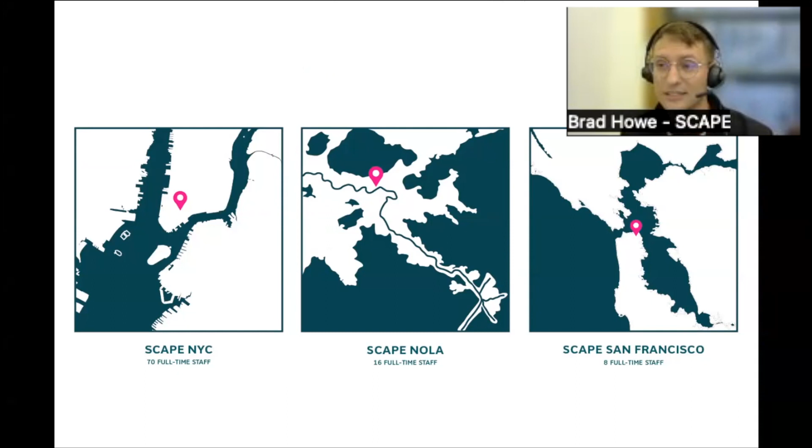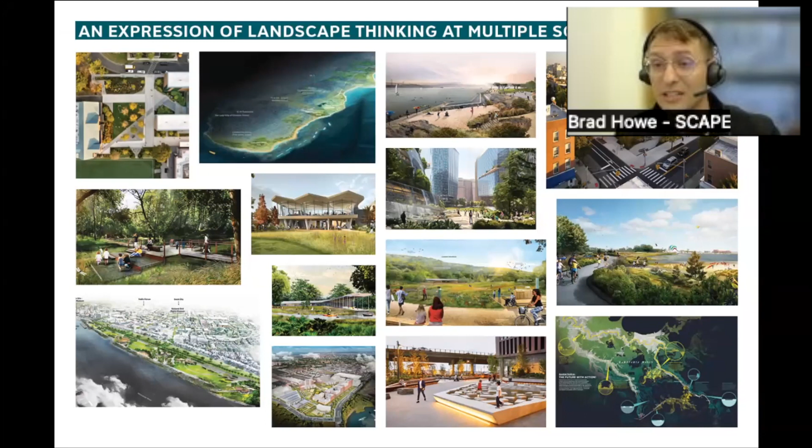So a little bit about SCAPE. We have 3 offices across the United States, an office in New York City, an office in New Orleans, and an office in San Francisco. And we are an office comprised of landscape architects, urban designers, urban planners, and horticulturalists. And this kind of multifaceted skill set in an office really allows us to think at multiple scales and take a really multidisciplinary approach to design, and through an expression of landscape at those multiple scales, ranging from anything from a small urban plaza to a master plan at the scale of a watershed in a 100-mile river corridor.

And so through that work, we really seek to revive landscape systems, identify those systems and bring them to the foreground, forge connections between people and the ecology and their environment, generate new ecosystems, in thinking about what the future of our urban ecology is, and embracing that physical reality through actually getting to the site, touching it, and experimenting, piloting, and engaging people in that process.

And so there's a great introduction on Living Breakwaters, and so I'm going to share that project with you today. And I'm going to share one other, Tom Lee Park in Memphis. These are projects that are quite different. They're both situated on the waterfront, one is actually in the water, while the other one is along the water, and they're both in very different environments. One is coastal in Staten Island in New York City, and the other one is along the Mississippi River in Tennessee. But they do have some things in common.

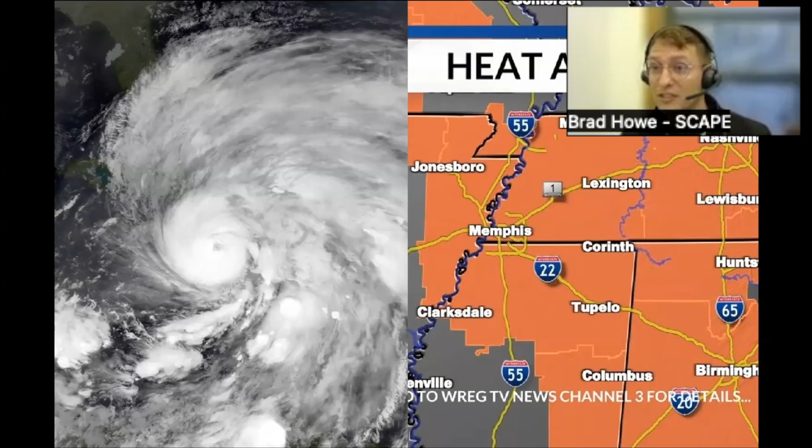They're both landscapes that mitigate future risk, but in different ways. So with the Living Breakwaters, the idea is that this is a project that uses a blue-green infrastructure approach to mitigate coastal risk from future hurricanes, coastal erosion, and sea level rise. Whereas Tom Lee Park is much different. I think Memphis has a different set of challenges, and I think especially felt this summer with the incredible heat waves that really hit this region. And so this kind of emphasis and need on open space and shade and trees has really come to the forefront in this community.

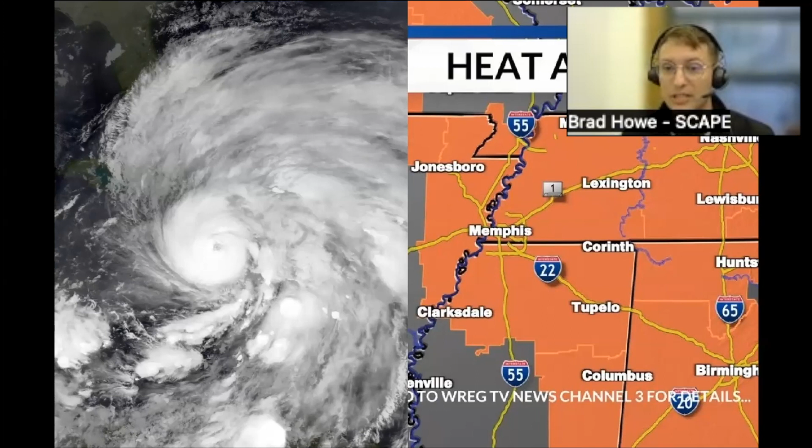And they both have ecosystems and species that are struggling to keep up with the pace of change. In Staten Island, the oyster - this is a species that was once prolific in the harbor and has now been nearly depleted. There are large-scale restoration efforts looking to bring them back.

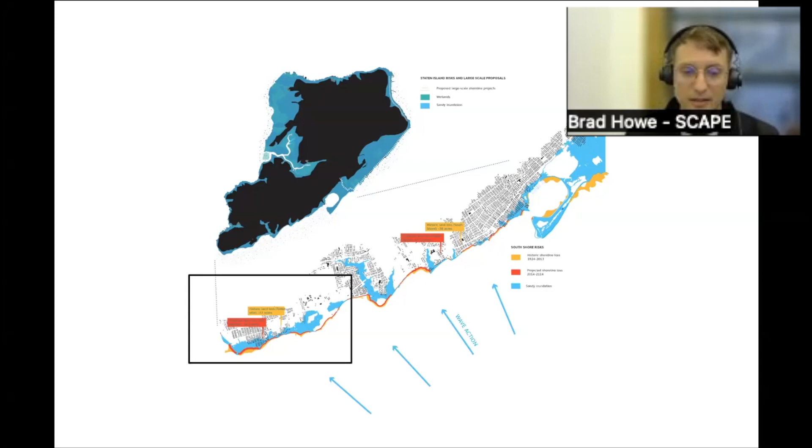So a competition was launched called Rebuild by Design. This was a challenge to designers, thinkers, planners, architects, landscape architects to come up with ideas to address climate change and address these increasing risks of living in this area.

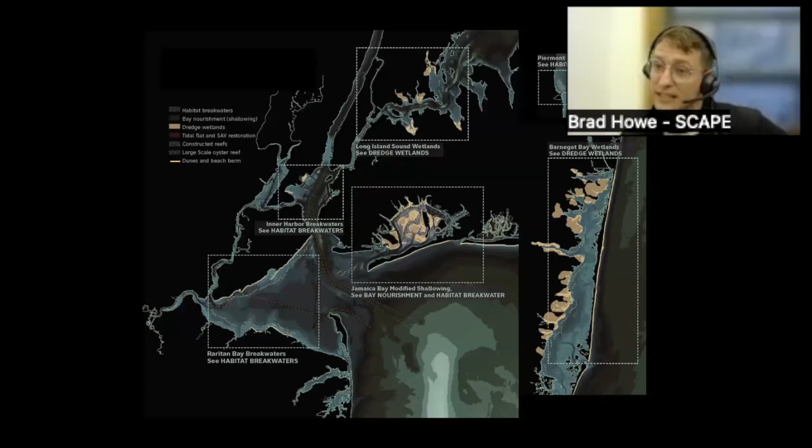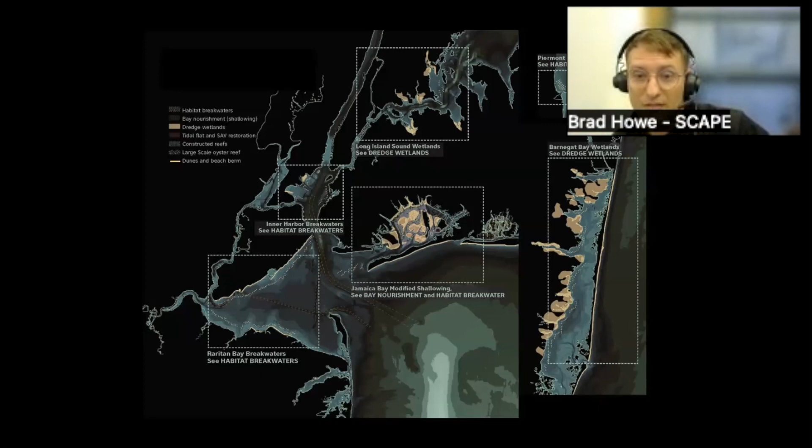And SCAPE led a team to - the first step of that was to research these bay shallow areas in the region and come up with 5 or 6 proposals for a project. Out of that research phase, the Living Breakwaters project was selected to advance into the concept and competition phase. And so we assembled a team to do that.

And the team grew. Once the project was awarded funding and won that concept and competition phase from Rebuild by Design, the Governor's Office of Storm Recovery in New York led the implementation of this. SCAPE assembled a team of engineers, ecologists, and nonprofit organizations, including the Billion Oyster Project, to really come together and make this project a reality.

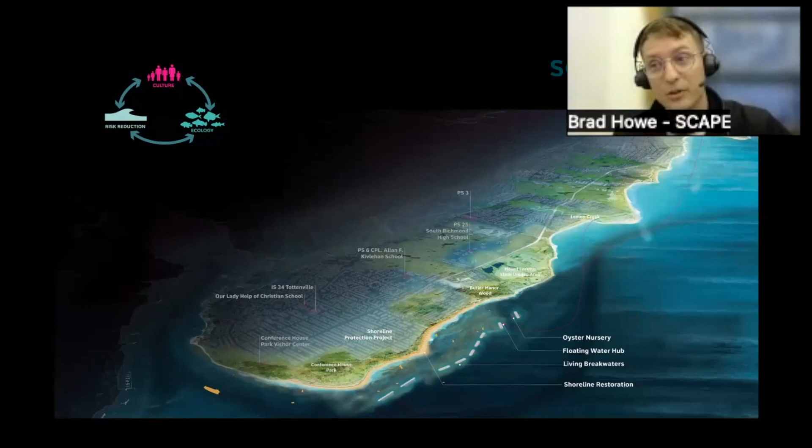And so here's that first rendering. You can see this offshore series of breakwaters designed as an integrated approach to coastal risk reduction, habitat generation, and establishing a culture of resilience on the shoreline and educating people about coastal risk. So the project itself is more than just a living breakwater.

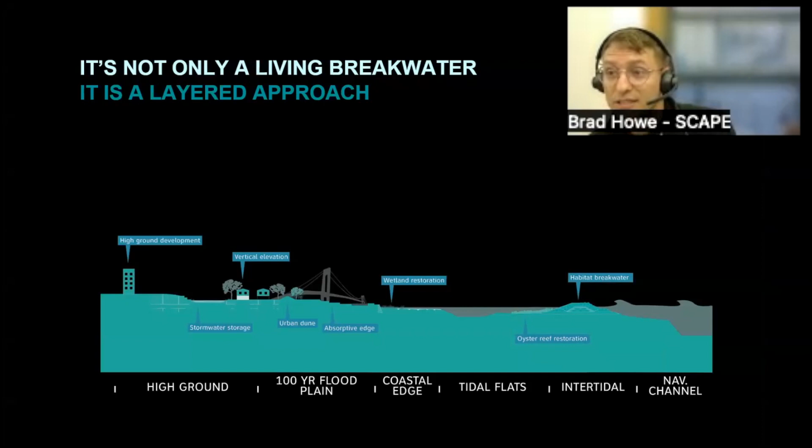It's a layered approach of different resilient solutions that creates this culture of resilience on the shoreline. And I'm going to start peppering in some construction photographs here because we're very excited that this project's moving through its construction phase, and it's nearing its halfway completion point. But you can see how this layered approach is starting to take shape.

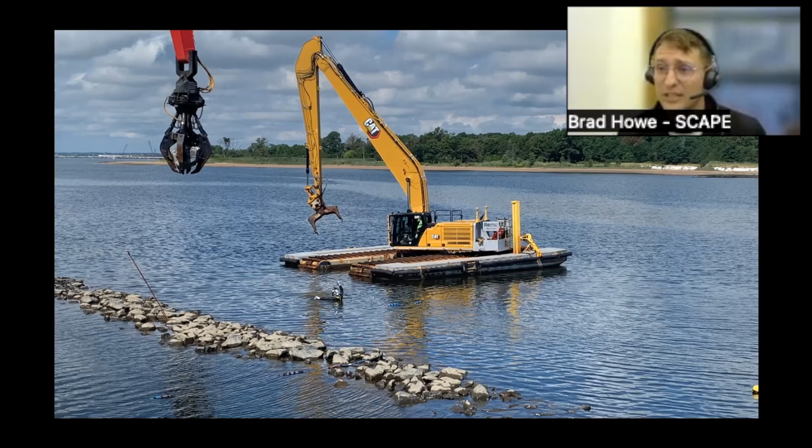You have this onshore dune, a beach, this calmer water between the beach and the breakwater, and then the habitat breakwater offshore that attenuates the storm waves and reduces the shoreline erosion.

So in looking at those three parts - the risk reduction, the habitat creation, and the social resilience - the first point of living breakwaters is it's blue-green infrastructure that mitigates coastal risk. So living breakwaters build beaches, they reduce coastal erosion and help build that beach back.

And so you can see here, this is just a diagram that shows how we had to work pretty hard with our engineers to calibrate the distance offshore to make sure that we were getting the kind of salient response on the shoreline that we were looking for.

Breakwaters attenuate storm waves, but they do not keep floodwaters out. This is an important concept in the overall narrative of adaptation: there's no one solution to fit everything. There needs to be a conversation about the risks of living on the shoreline, identifying different coastal risks that projects can attenuate or mitigate. Here, the riskier component of the shoreline is exposure to larger storm waves, so the idea was that these living breakwaters can attenuate that risk.

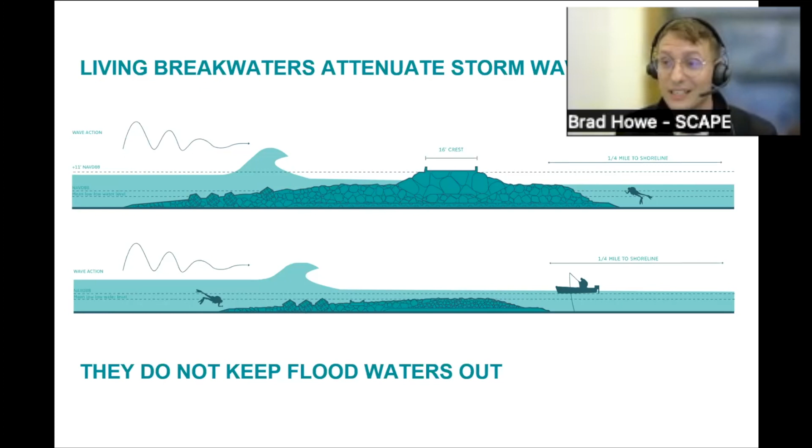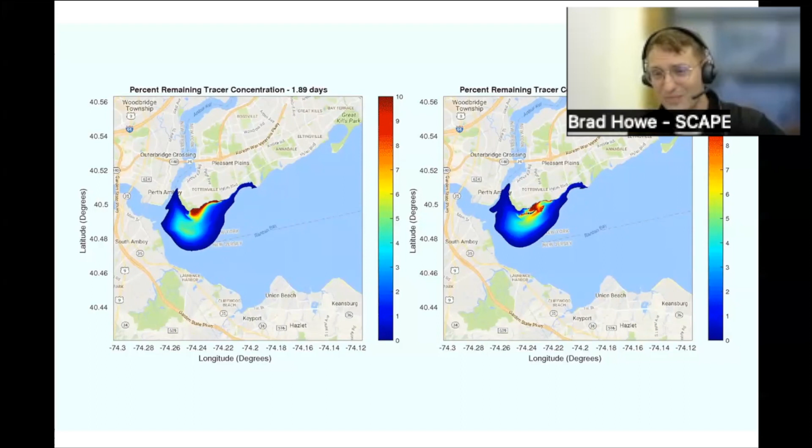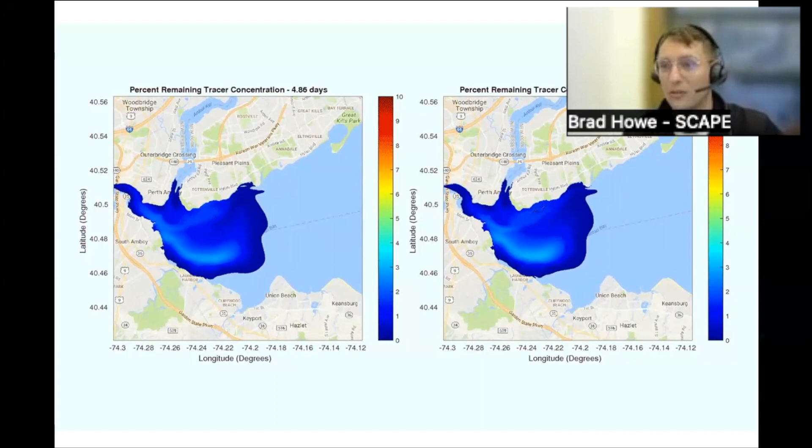We did that through a lot of coastal modeling, running computational models with our engineers to evaluate the effectiveness in wave height reduction through computer simulations of wave environments. We had to model and test water circulation and flow to make sure these structures weren't impeding the movement of water, and that the system was adequately flushing out, so there's no stagnant water behind the breakwaters. We even modeled these in a research facility.

And then here they are emerging from the water. You can see those, they almost look like little pork chops, but those are actually precast concrete tide pools that create more habitat in the structure, and also are substitutes for the armor stone or rocks in the breakwater itself.

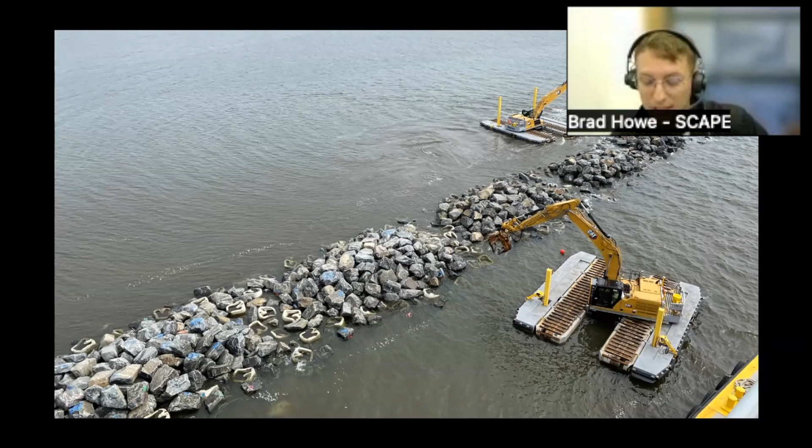This is just an image looking out. You can see back there, that's the crane barge that assists with individually placing stones from a barge onto these structures.

What we call them are reef ridges. They're essentially protrusions that reach off the main breakwater trunk that provide smaller niche spaces for young fish to retreat in the rock pores and then move out into those open reef streets and feed. So there's pore spaces for fish.

There are also ECOncrete armor units and ECOncrete tide pools. These are precast elements that function structurally within the rubble mound structure, but they've been precast with concrete specifically mixed with an admixture that targets and promotes biological growth on the concrete structure. And of course, there's room for other critters to roost on top of them as well.

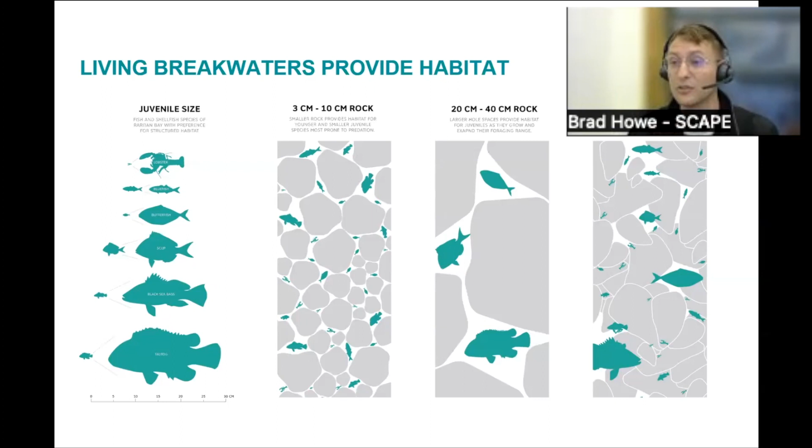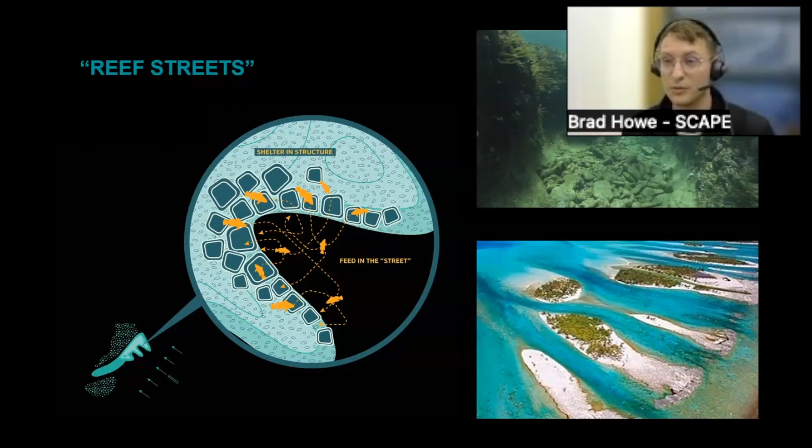The reef streets themselves are modeled off of naturally occurring structures and reefs. You can see how they create corridors of movement, allowing fish to find feeding ground, but also have a place to retreat to should they be in danger of predation.

This area was also constructed in Tottenville, also known as the town that Oyster built. A long time ago, this place had a thriving oyster economy, which has since diminished. The idea behind the living breakwater structure is to use them as a mechanism for oyster restoration in the Raritan Bay, which can be done through multiple methods.

Our partners at the Billion Oyster Project have been researching and piloting different techniques to evaluate their performance before placing them on the breakwaters. This ranges from gabion structures and cages with oysters seeded with larvae, to ECOncrete units that have attachments that can be seeded with oyster larvae and then attached to the structure where oysters can grow.

And also fundamentally, the living breakwaters provide more rocky structure, so as oyster larvae floats through the bay, they actually have something to settle and land on and accumulate.

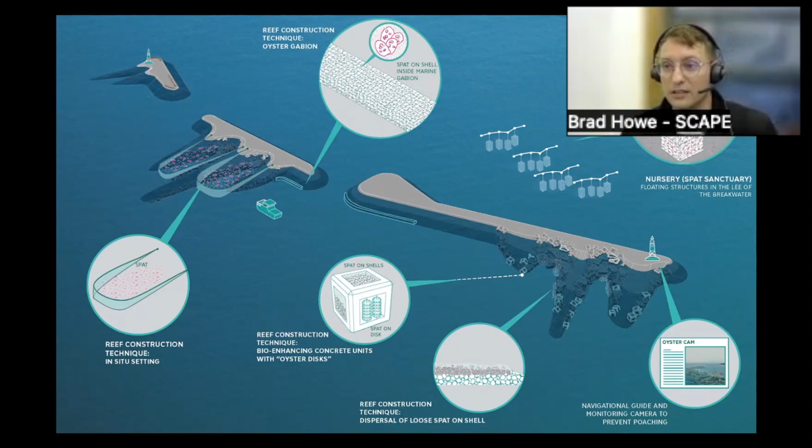But to design good habitat, you have to understand what you're designing for. So we did a lot of surveys. We had divers go out and look at rock piles in the area to see what was living there, what was growing on them, take samples of them, test them, bring them to a lab. And that allowed us to create a target species matrix, which helped us design the right pore spaces to target the right species and design that habitat for animals that are actually living there.

We had to understand the sediment system, so we looked at sediment grain size. We had people go out and take sediment grab samples, test them, evaluate them in a lab. And then we translated that data into our computer models to be able to model shoreline change.

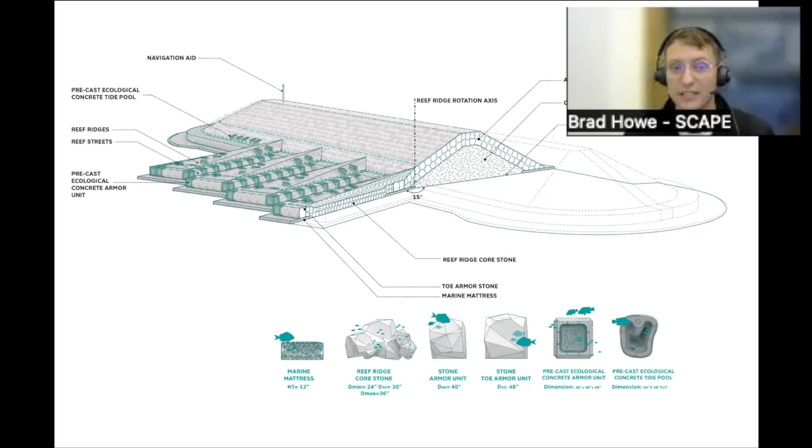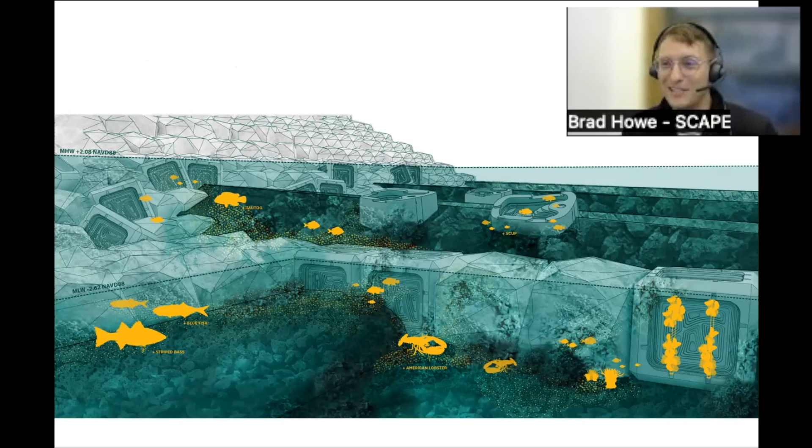This shows how those structures work together, ranging from a variety of stone sizes, the marine mattress, and those precast ecological concrete units, all coming together to form this habitat structure that provides robust underwater habitat life. And I think what we've found in the installation of these few concrete structures and breakwaters that have gone in now, things are already starting to move in and grow.

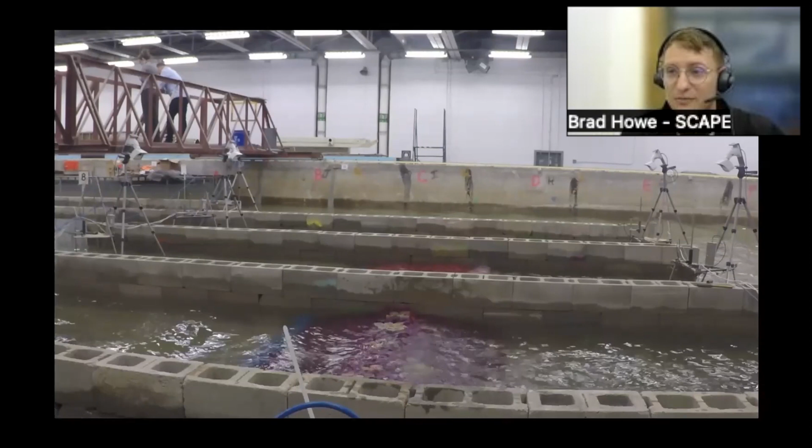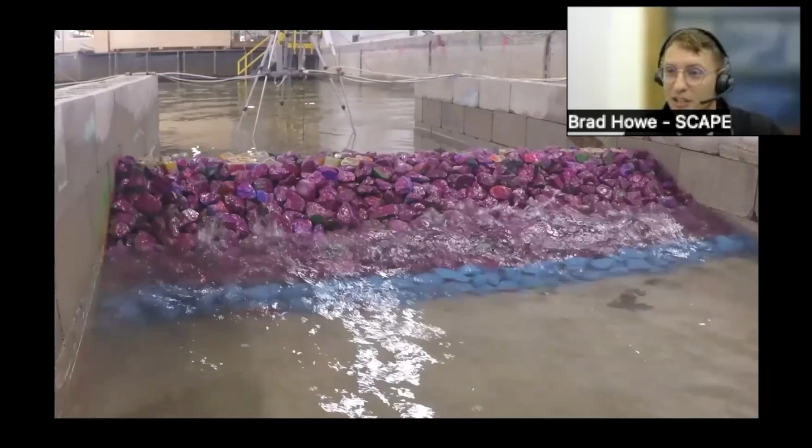Finally, we had to really pilot test and experiment. So this is video footage from that wave tank I talked about earlier. You can see how different sizes of waves were tested, crashing into that structure. The different colors of rocks are spray painted to correspond to the different rock sizes specified in the project, so we could track if a rock was dislodged, where it was dislodged from, and evaluate the design.

Finally, for that last part of building social resilience through education, the idea is to create a culture of resilience at the shoreline through educating youth about coastal risk and how the Living Breakwaters actually mitigate that risk. This is done through organizing oyster restoration volunteer events, with student volunteers helping, and holding a variety of community engagement events to help kids understand the cross-section of the bay environment and what's living down there.

We bring people to the site, teach them about the dynamics of the site, and show them how the Living Breakwaters project will change that. And then finally, taking it to the classroom: we've been working with the Billion Oyster Project to develop a curriculum based on Living Breakwaters. The idea is that high school STEAM teachers can download this and include Living Breakwaters and some of the Billion Oyster Project's restoration efforts into their curriculums.

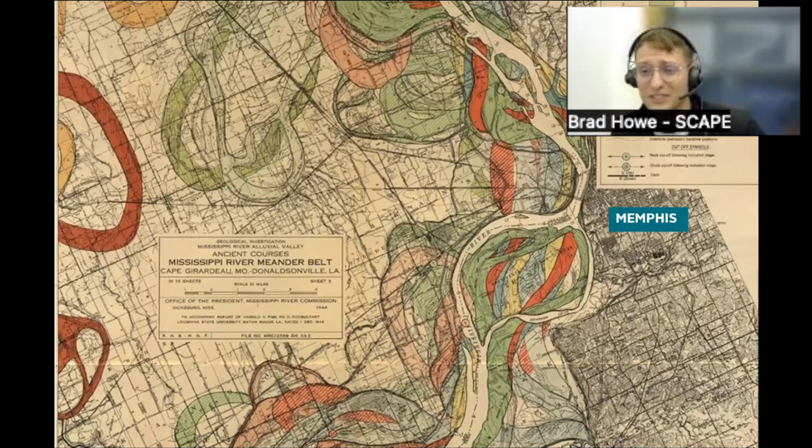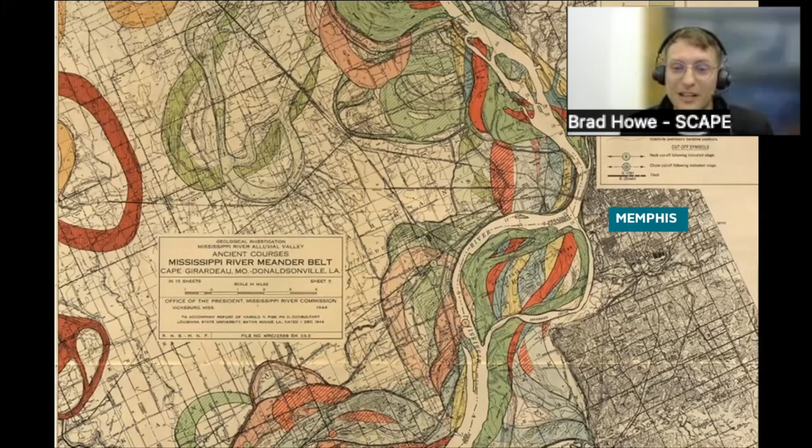Now moving south a bit to Tom Lee Park, a very different context. Tom Lee Park is on the mighty Mississippi, which, as these beautiful Fisk maps show, is a difficult river to predict and channelize, despite some of the best efforts along the river. We were really inspired by the context of the park and by the meandering forms the Mississippi River takes on in that region, and you can see that reflected in the design.

But it's in a weird place in terms of how the site was created over time, and the history of this site is actually quite interesting. You've got Memphis, located up on a bluff, and Tom Lee Park at the base of that bluff along the riverfront. Across the river, you can see the dynamic floodplain of Arkansas, which has not been hardened, so you can see the flood paths the river takes through its seasons. On the Memphis side, it's expressed as more of a stark line.

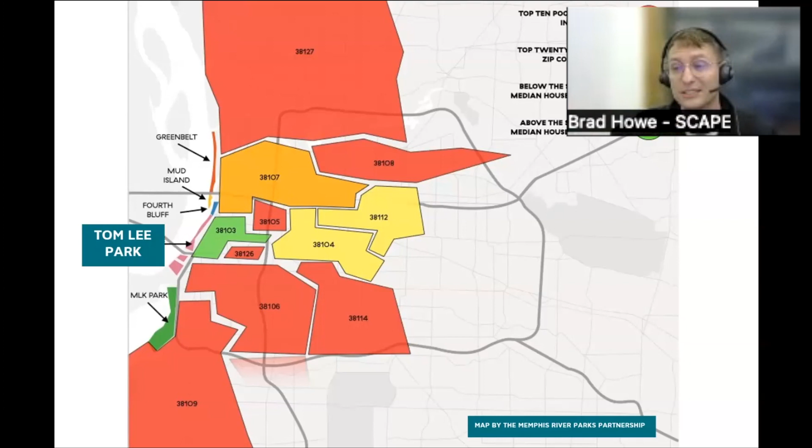And what's interesting about the Memphis riverfront is it's really this common ground. It's a place for all Memphians. So you can see in terms of the context of the space, 6 of the poorest zip codes in Tennessee are actually in the vicinity of the Memphis waterfront. But you can also see there are zip codes that are above the median household income. So there's a really large transect of populations that live near the riverfront. And the idea is that this riverfront is that common ground for all people to be at and enjoy. But it's not really accessible.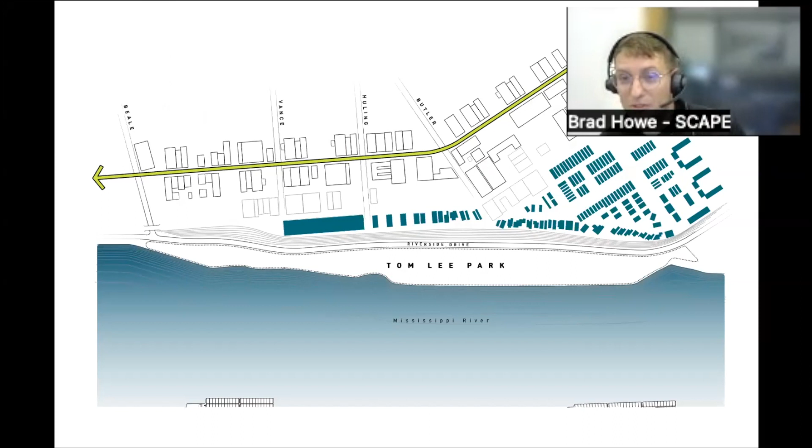The bluff kind of really cuts access from the city to its waterfront. So a big part of this project was unlocking that access and bringing people to the water's edge through ADA accessible connections down the bluff.

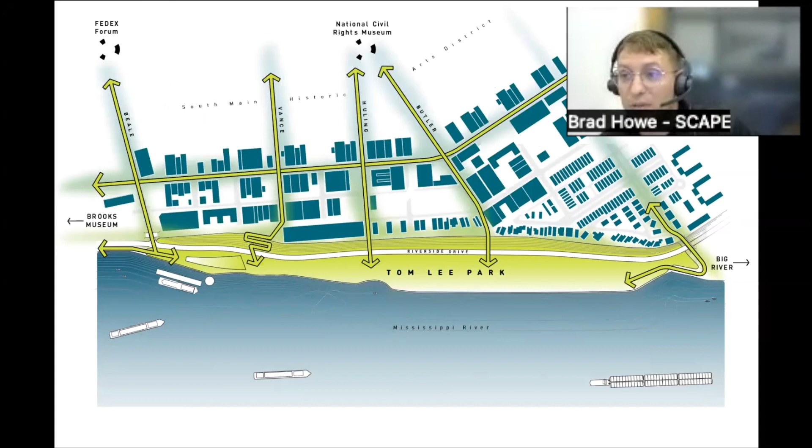So it took a team to get there. We partnered with Studio Gang, who led the team of designers. We were the landscape architects on the project. There's a couple structures in the park that they designed, and they've been really great partners throughout the design and construction process. And then of course it goes without saying, the Memphis River Parks Partnership, huge in the fundraising for this, spearheading its implementation and making this park a reality.

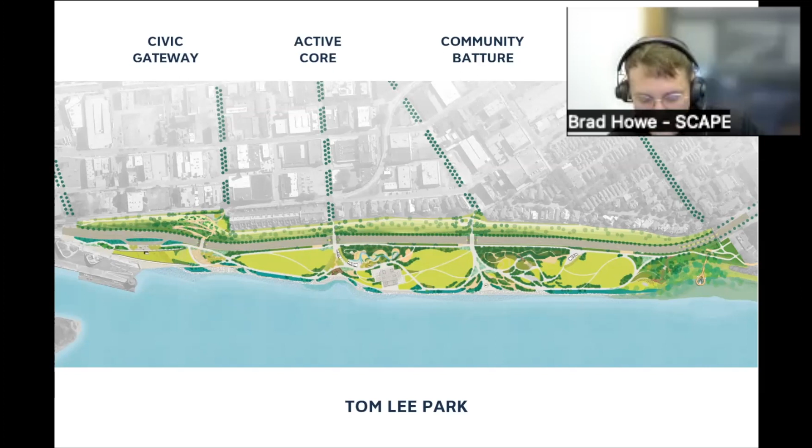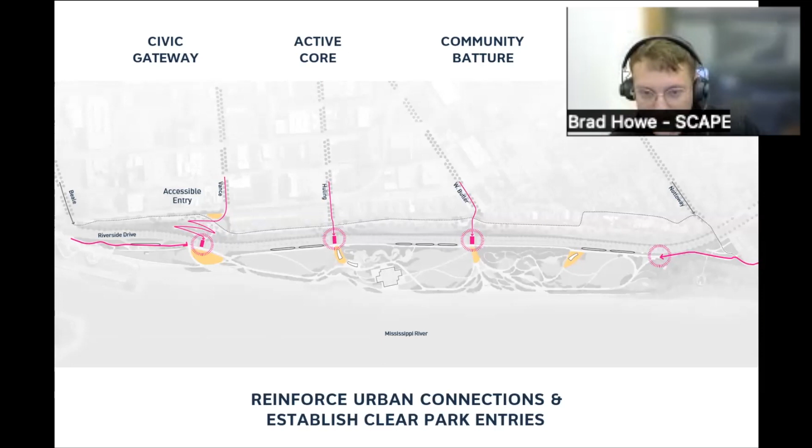So in terms of setting up that structure, we first wanted to reinforce those urban connections, connect people that live on the bluff, down the bluff through ADA accessible entries to these key landing points and entries. And then connecting those with a hierarchy of different path networks that stitch together a range of active park uses.

And through that, we had these different zones emerge that had different almost characters. There's the civic gateway, there's the active core, which is very playful, active, and fun. The community batture, which is marked by topography and more pensive park moments. There's a memorial sited there, an overlook, a picnic grove.

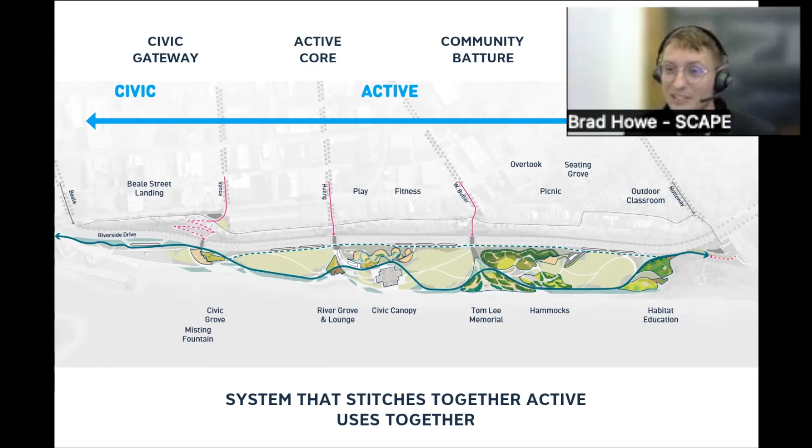And then finally, as the park transitioned to this edge of the rock wall that had actually collapsed, and the river had kind of taken it back a little bit and reclaimed that space, there was a lot of riparian habitat. So the idea is to create these habitat education elements to really bring people closer to the river's edge without getting them down to the water. Because as you can imagine, the Mississippi is not a safe river for people to get close to or even dip their toes in, because its currents are so powerful.

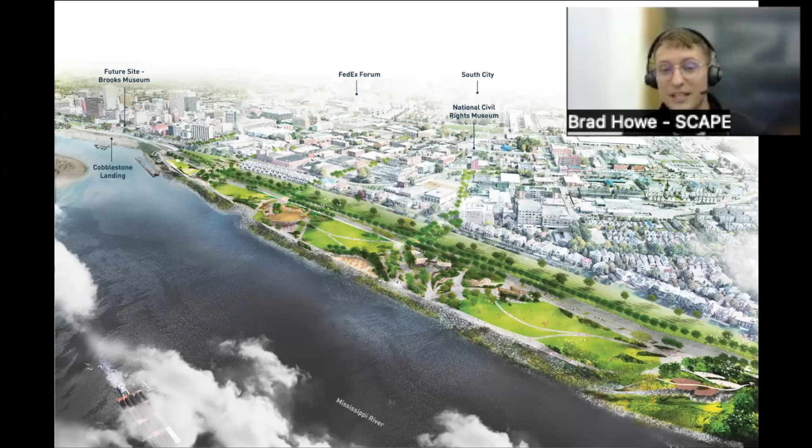And so this is the rendering we showed that kind of shows those dynamic forms. And this is the park kind of in the middle of construction. So y'all are getting a little bit of a sneak peek of 2 projects that are very much in the middle of their construction process.

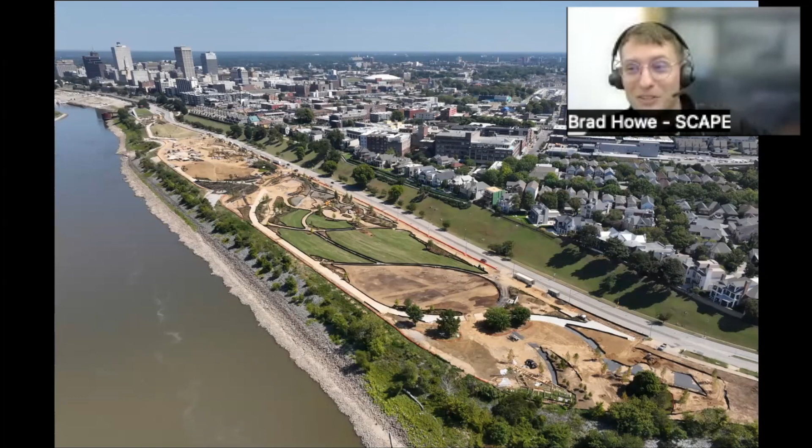So I just thought I'd walk through each of the zones. The Civic Gateway has 2 major components. It has that ADA accessible walkway that connects the city up on top of the bluff down to the park, crossing the street to this almost civic water feature and plaza.

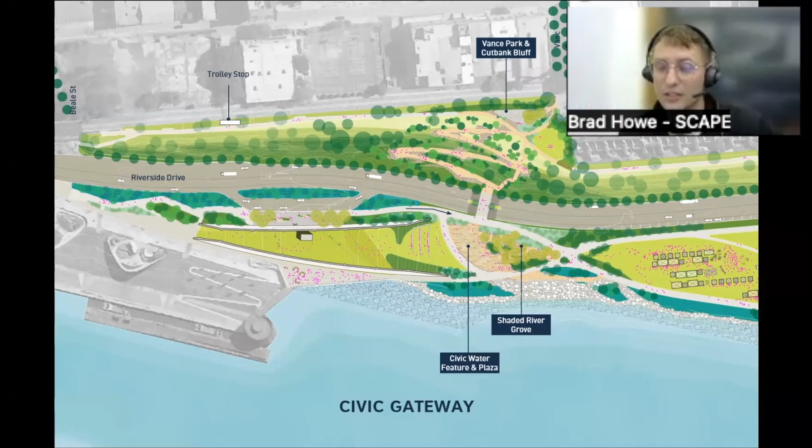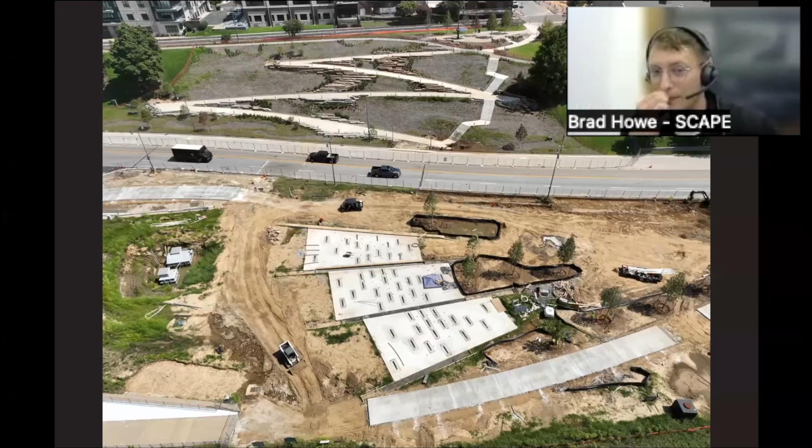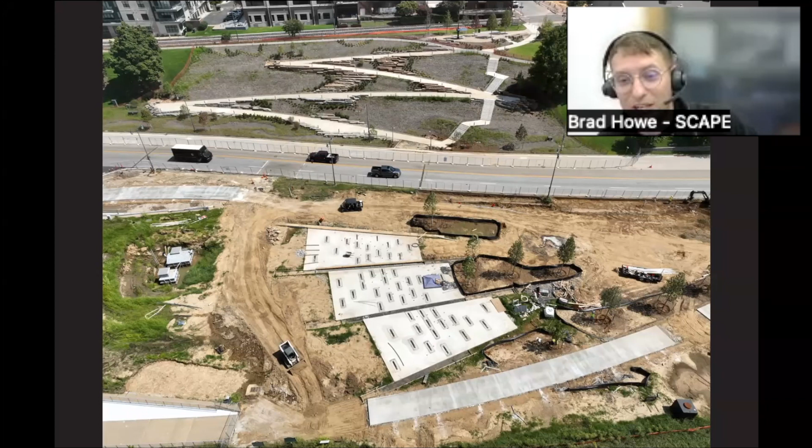These are just some renderings of the bluff and that plaza, and then you can see them in process and in construction. The idea here is to greet people from the north with a very civic space, providing paved areas for performances, for farmers markets, for different events, while also simply planting trees for shade and creating a shaded grove right adjacent to that area.

This is what we call the Cutbank Bluff, which is that ADA accessible entry and pathway down the bluff.

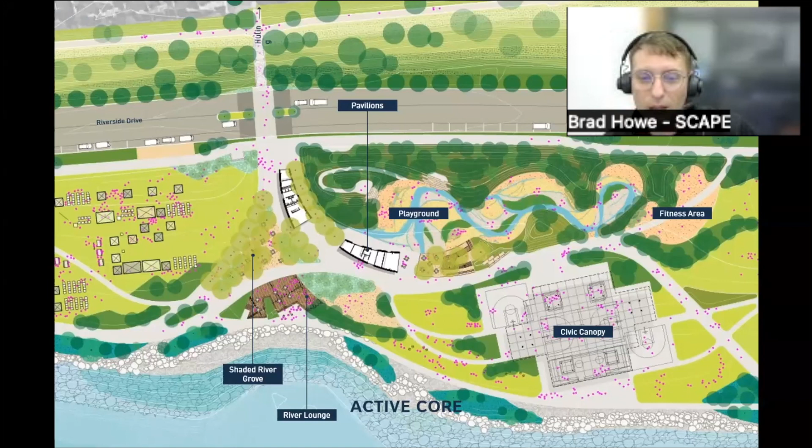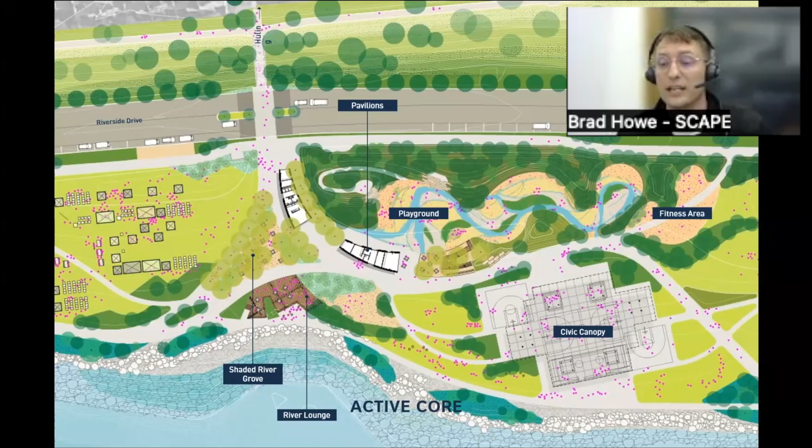This is the active core. The idea here is this is sort of teeming with activity. We've collaborated with Monstrum for the design of a really unique and iconic playground. Studio Gang designed an incredible overhead civic canopy that shades sport courts. There's 2 pavilions to support park programs, and then some smaller spaces to just sit and enjoy the sunset over the river.

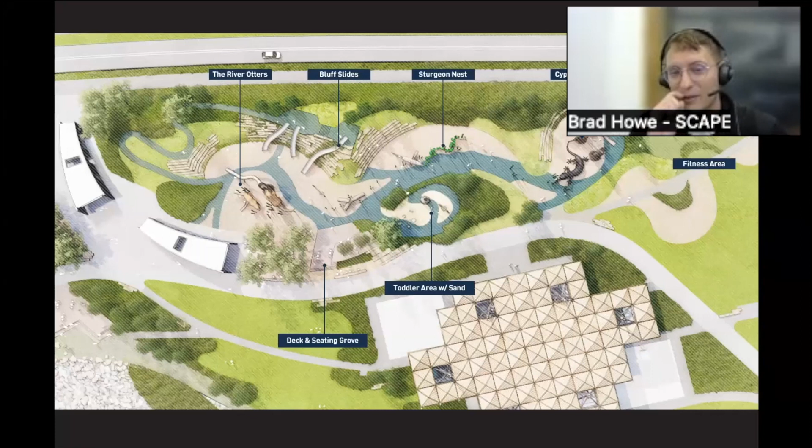You can see that civic canopy in the background here. And this is the plan of our playground, which has been designed and inspired by this idea of life on the Mississippi. So the blue is a reflection of the Mississippi, one of the Mississippi pathways in that Fisk map. And along that are some different characters of the river or different wildlife that you might find at the edge.

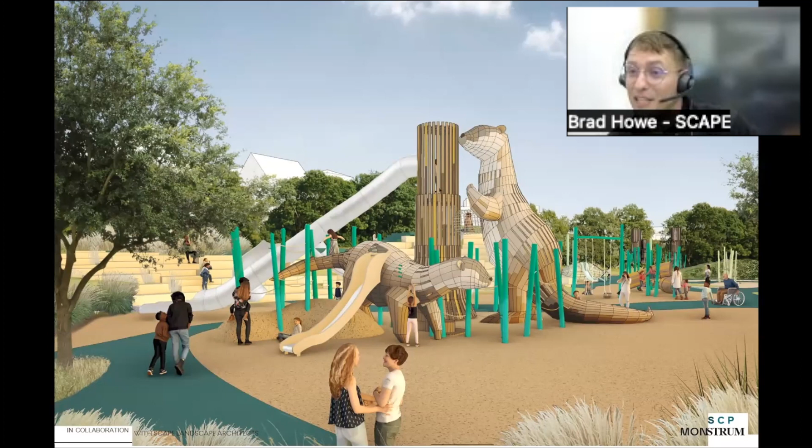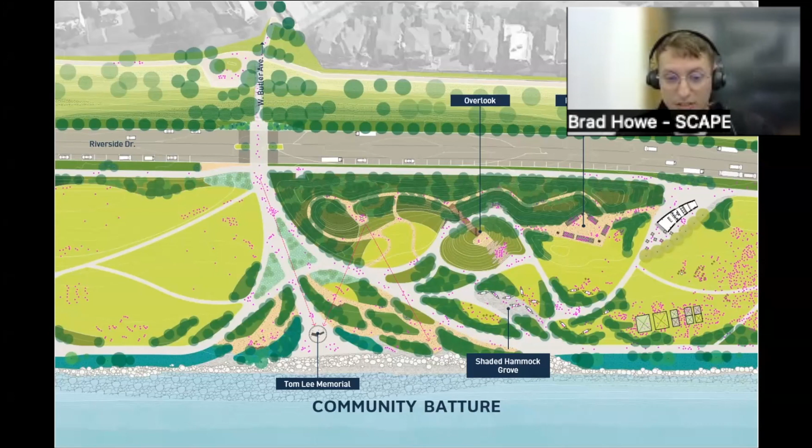And it's also been supplemented with the work of artist Theaster Gates, who we've collaborated with to create a site installation that creates a sort of walking experience through the park to tell the story of Tom Lee. And you can see that here.

There's a point of reflection in that circular kind of place to be that connects to this, what we call the point of redemption, which is this moment of reckoning along the water's edge, and a reminder of the heroism of Tom Lee. All the while, that procession and connection to that installation always has views back to the original Tom Lee Memorial statue. So it's always a reminder along that way of the risk that Tom Lee took to save these people.

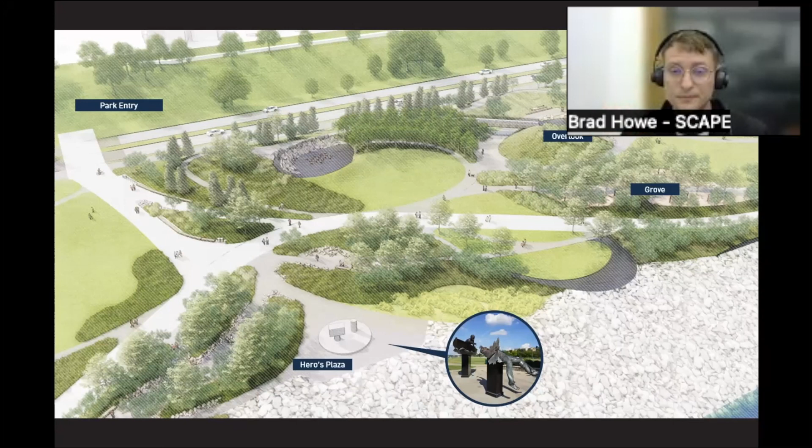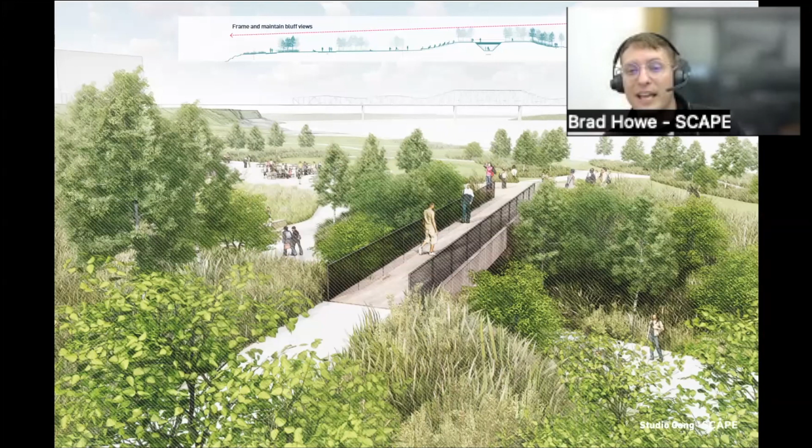But the Batture also has great topography. We really wanted to elevate people up off of that flat surface and give them different views of the river. And what was interesting about this particular project is that we were a little bit limited in what we could do because this is a huge erosion protection infrastructure project by the Army Corps.

We weren't actually allowed to dig into the site. We were only allowed to import fill in this case, because had we dug, we would have compromised the integrity of the cap, which basically keeps water from draining into that dredged material and creating pressure on the backside of that rock wall.

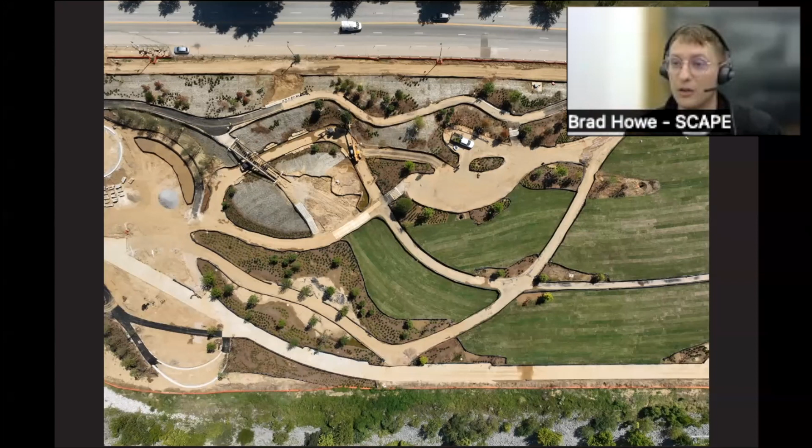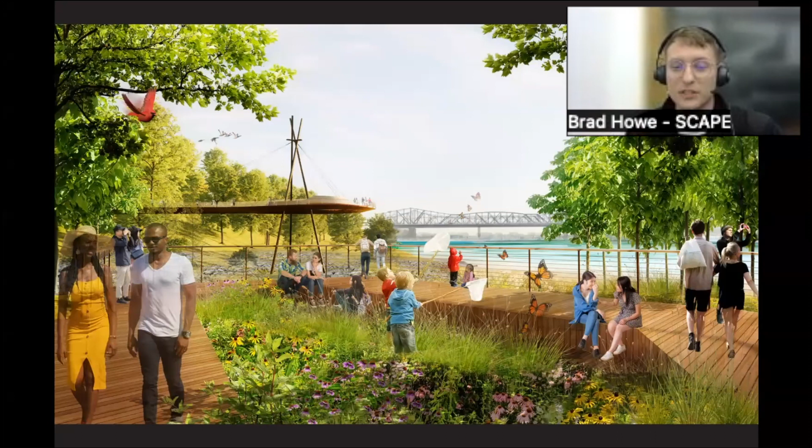And finally, the habitat terraces. The idea behind this area is to really get people a little bit closer to the river, a little bit closer to the water's edge, to really engage with the natural wildlife and habitat of the place.

Because the Memphis riverfront is habitat, despite its very urban location and urban character. It's very much on the Mississippi River. It's on the Mississippi Flyway. And this is a place where many, many insects and many, many animals make their home. So one thing we thought a lot about was this location on the Flyway, and what different plants have these host relationships with these different insects. So the milkweed for the monarch butterfly, but there's also this great story of the pawpaw and the zebra swallowtail.

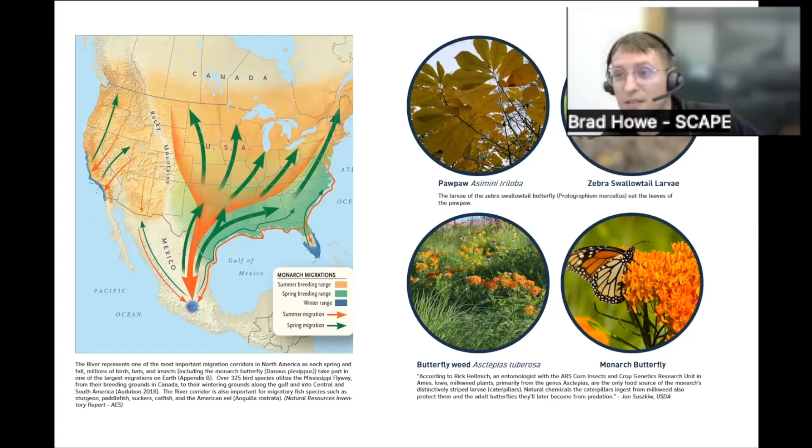The zebra swallowtail larva really only eats the leaf of the pawpaw, and so there's this great symbiotic relationship between the two. So we really look to plant these charismatic host plants and insect relationships into the park through implementation of what we call the pollinator shoreline.

So we designed the shoreline with different plants that target the monarch butterfly to create a stopover along the flyway that will hopefully attract all of the different species that use the flyway, but hopefully mostly the monarch. Actually I was on site yesterday and counted 5 monarch butterflies, and we haven't even planted the milkweed yet. So I know that they're there.

But we've also introduced trees. It seems like such a simple concept, but it's so important, especially on this waterfront. So we thought about all of the native oak species of this area and really looked at them as a keystone species for the site.

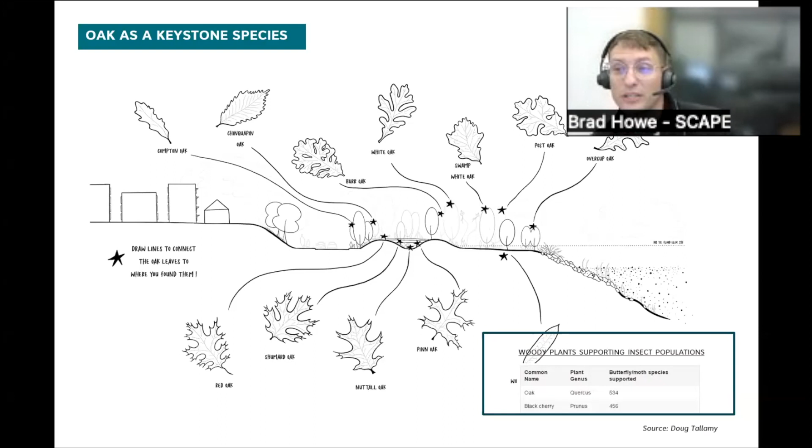We're introducing over 1,000 trees onto the site, and over 400 of them oaks. In terms of supporting insect populations, the oak, from Doug Tallamy, is the plant genus that actually has the most butterfly and moth species supported. So these trees for this site both provide habitat and provide shade.

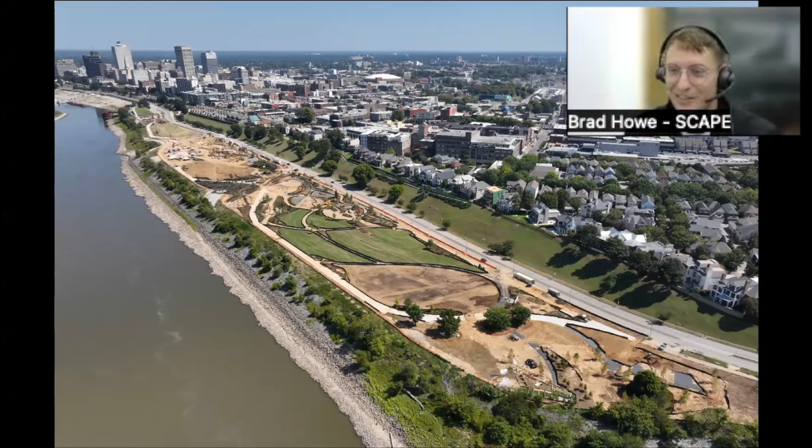So that takes us back to the overall bird's eye view, or drone's eye view in this case. Thank you, happy to take questions from the group. I think I hit right on my 40-minute mark too.

Awesome, thank you. Let's give Brad a round of applause. That was great. I need to set up this mic really quickly. Somehow.

Can you hear us all right? Yeah. No? Oh, there's a lot of feedback from me though. Okay. Right. So we'll use this mic and then we'll mute out, which hopefully will take care of that.

Does anyone have any questions at the moment? I'm happy to start off. Yeah go ahead, if you stand up you should be able to, and just speak up, this should get you. Okay, so my question is, I was just curious, I don't know if you talked about it, I don't remember if you hit on it, but in your diagrams I was just curious why you guys chose, I guess it depends what you chose. Did you have an overpass over the road, or did you have people walking across it? And what made you come to that decision?